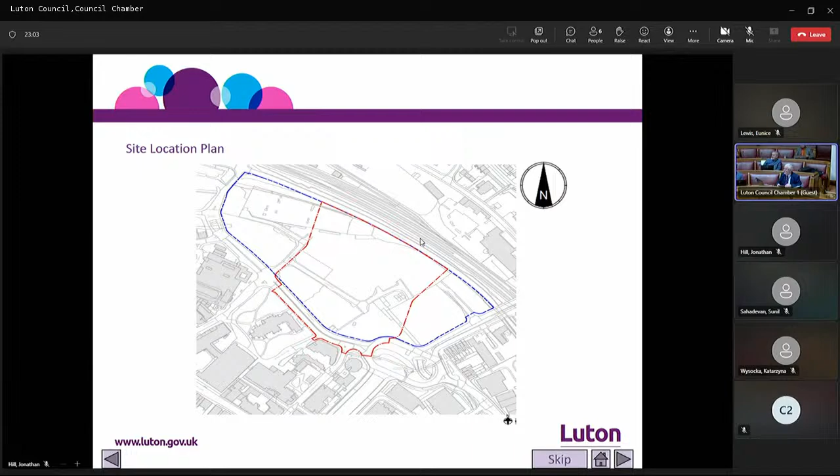The application site is located in Luton Town Centre's northeast gateway, bounded to the north by the route of the Luton Dunstable guided busway and to the south by St Mary's Road. To the west is Church Road and to the east Crawley Green Road. If I could have the next slide, please.

Members will be aware that the application site benefits from the grant of planning permission under reference 16/01400, which as part of these proposals included commercial and residential development and the stadium. If I could have the next slide, please.

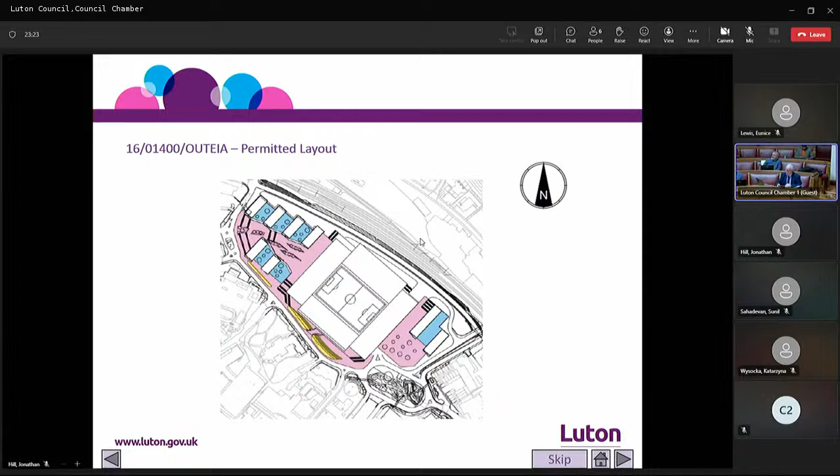A subsequent grant of planning permission under reference 20/01587 provided for the residential and commercial elements of the redevelopment, but excluding the stadium. If I could have the next slide, please.

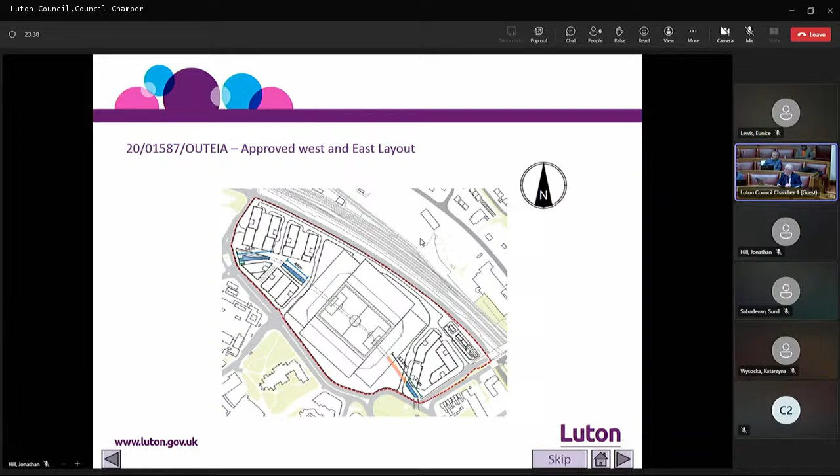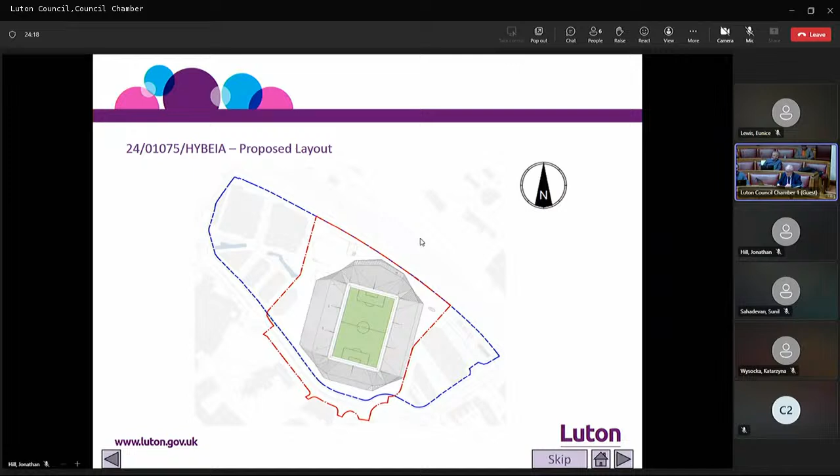This is the application site wedged between the west and east residential elements referred to under application 20-01587. In addition, further applications have been submitted, most notably for engineering works to move earth and create a development platform across the wider Power Court site, and for the realignment and opening up of the culverted River Lea with associated works to enable redevelopment for the stadium.

This slide provides the context for the development of the application site, which is situated in the middle of two mixed-use residential sites. These uses include appropriate town centre uses, a health centre, retail community uses, and food and drink establishments, which were permitted under the 2020 application reference.

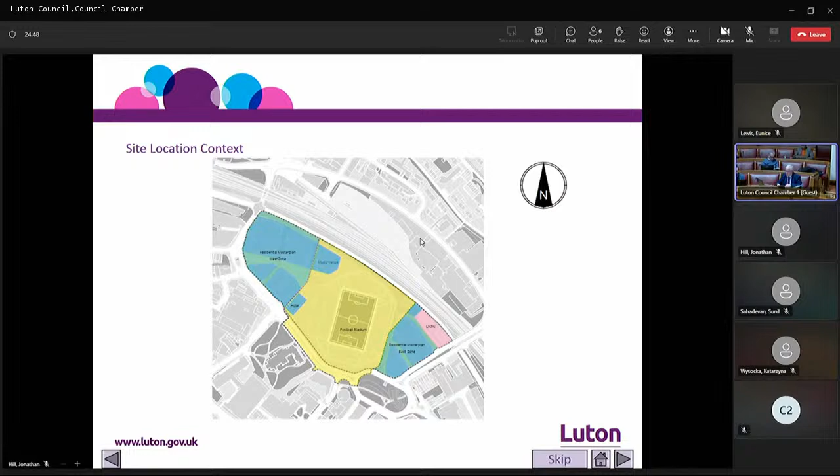This slide shows more specifically the location of the stadium footprint and those elements the subject of the outline application, namely at 1, the one at the top of the slide, the entertainment, music and conference venue, and 2, the one at the western point, the hotel.

The extant 2016 planning permission made provision for both of these elements, and they are carried forward to this application. As set out in the report, save for siting, all other matters—appearance, landscaping, layout and scale—will be the subject of a reserved matters application.

Parameter plans provide details of maximum height, building parcel dimensions, primary and secondary frontages, servicing and plant within that, and public and pedestrian access.

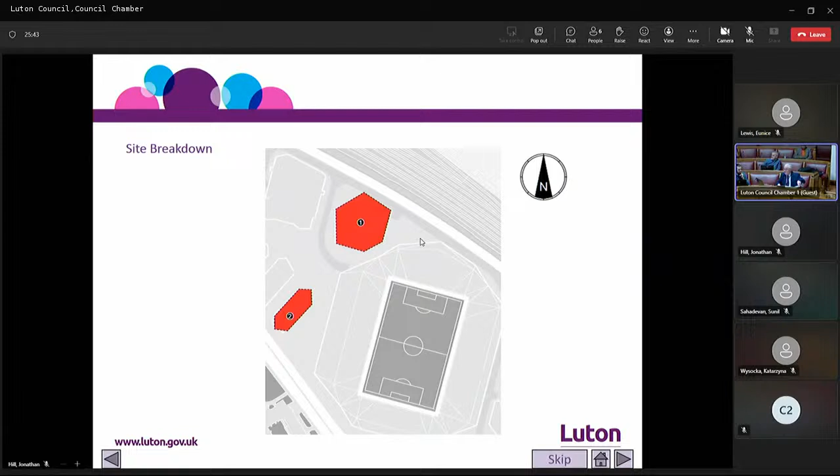Moving on now to the stadium development. The design is covered in some detail in paragraphs 184 to 238 of the report. In this presentation, I propose to deal with the basic concept of the design.

From this slide, the evolution of the form of the stadium can be seen from the four unique stands with corner infills providing both active and working frontages.

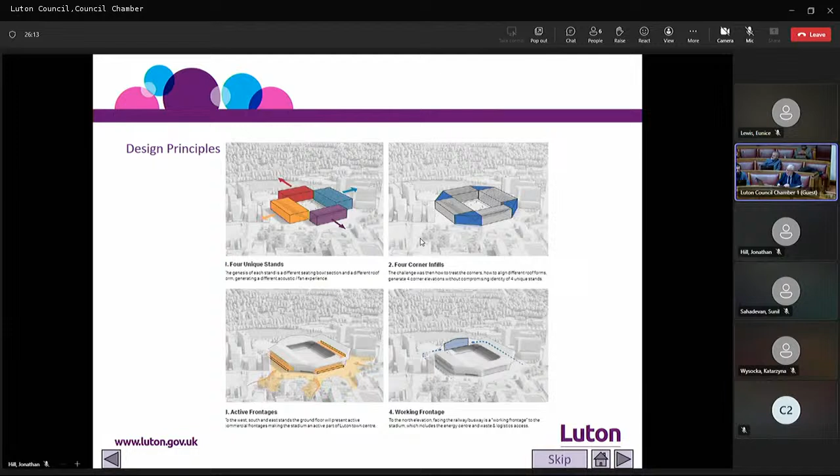This concept then evolves further, providing robust entry portals, corner pod stands, and a scale, height and massing in concert with its surroundings. Finally, the halo, a feature of the 2016 application, is carried forward to the current proposals.

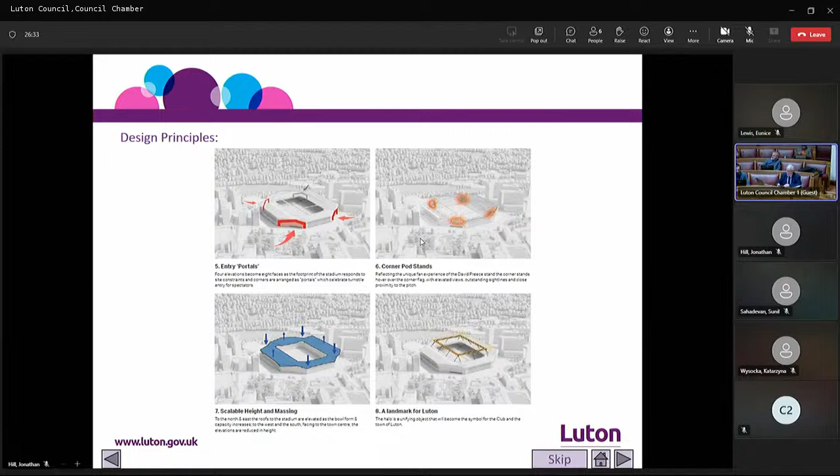This slide and the one that follows show the resulting elevations. You can see from the elevations that the normal boxy type appearance of a stadium is lost with this design, which breaks up the roof by introducing pods at the various ends of the stadium.

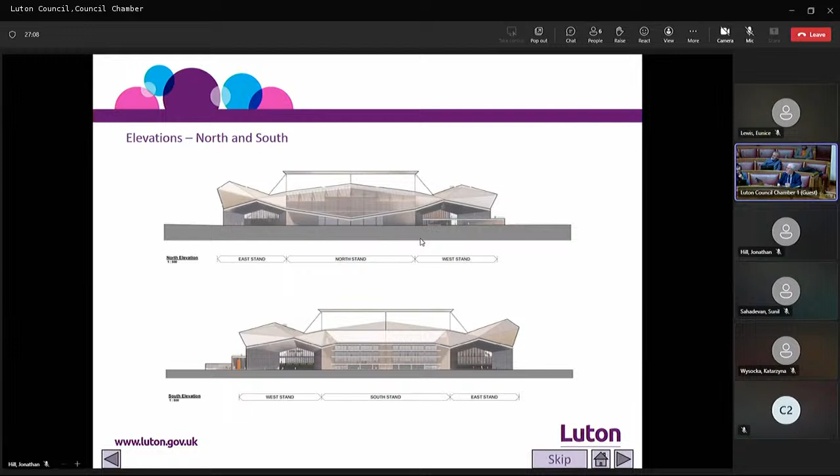That's the north and south stands, the one to which I just referred.

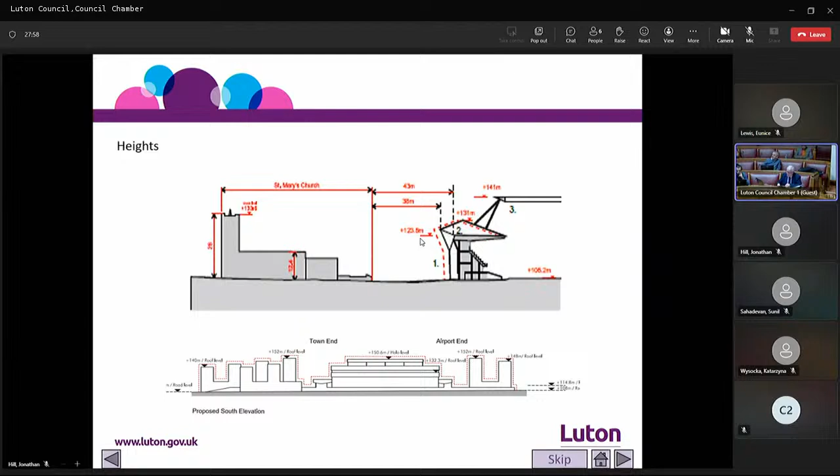This slide shows in more detail the variation in height between the 2016 development and the current application. There is a variation of 9 meters between the extant consent and that now proposed.

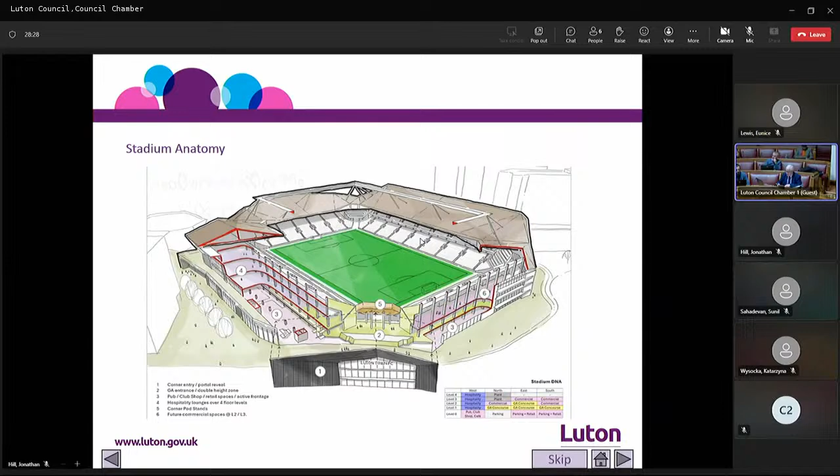This slide shows in more detail the function of the various levels: the corner entry portal reveal, the general entrance, the pub, club shop, retail spaces and active frontages, hospitality lounges over 4 floors, corner pod stands, and future commercial spaces.

At present, the river is predominantly culverted through the site and runs from west to east. This means that currently there are only very small and inaccessible sections of the river on the westernmost and east of the site which are open, while other areas are fully culverted under the site. In the areas that are open, the river cannot be seen as the riverbed is situated 3 meters below ground level.

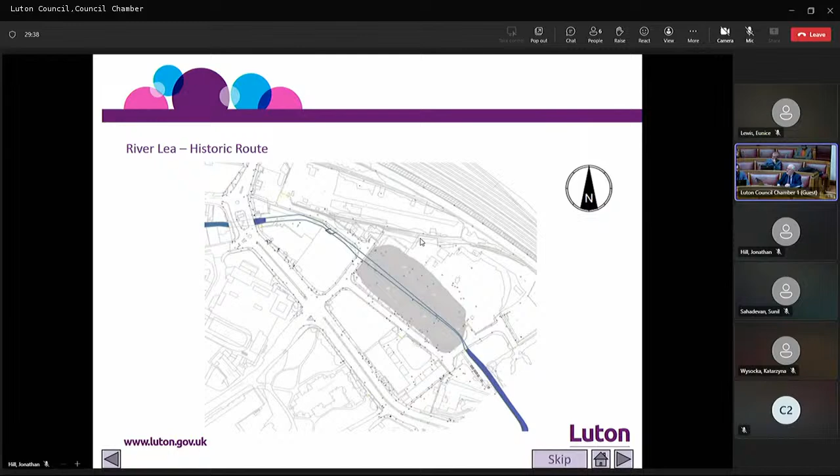The approved 2016 proposal rerouted the River Lea to run along St Mary's Road. The proposal partially deculverted the river in 3 areas while integrating public realm along St Mary's Road, which would still have 2 lanes of traffic running alongside the river.

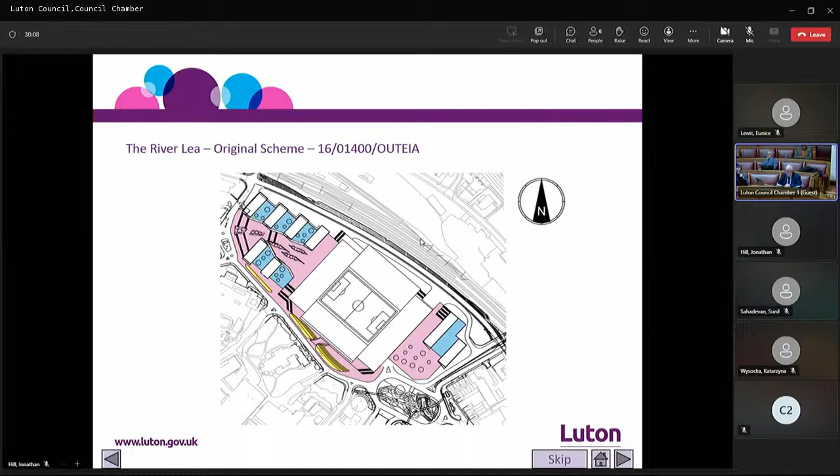The majority of the Power Court 2016 proposal would be on a podium, raised about 6 meters off the ground. This was to facilitate access and parking under the stadium.

In 2016, if that application is pursued, the levels would prove a further constraint to opening up the River Lea within the red line boundary, where the river is 3 to 4 meters below grade, which, if deculverted, would create a deep river trench. To facilitate amenity access, large banks and steps would be required, which would further limit crowd movement and create a barrier to the integration of Power Court with the wider town.

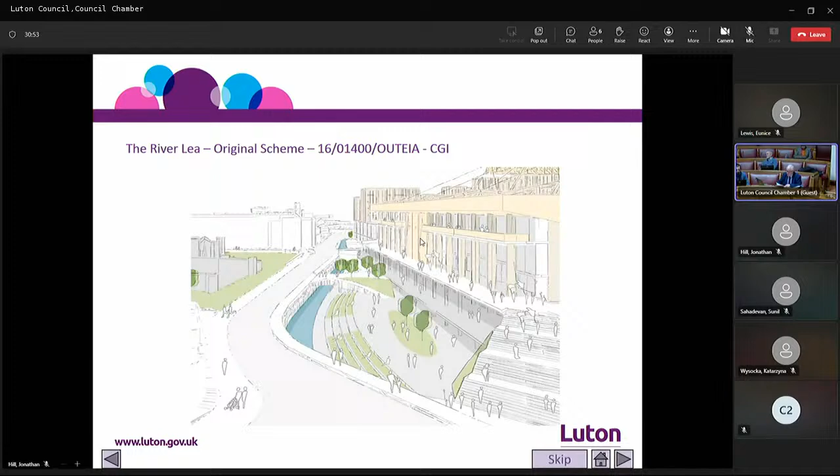The 2024 application, which has been approved, will provide multi-deculverted sections to the west end of the site, whilst ensuring crowd control associated with the proposed stadium can be appropriately and safely managed. Rerouting the central section rather than keeping it culverted under the future stadium will ensure the stadium can be delivered. The river culvert can be maintained sustainably through a new culverted route running along the edge of St Mary's Road around the stadium. The public realm proposals allow the river to be the focal point of the proposed plaza within the site, a significant design improvement from the existing consent.

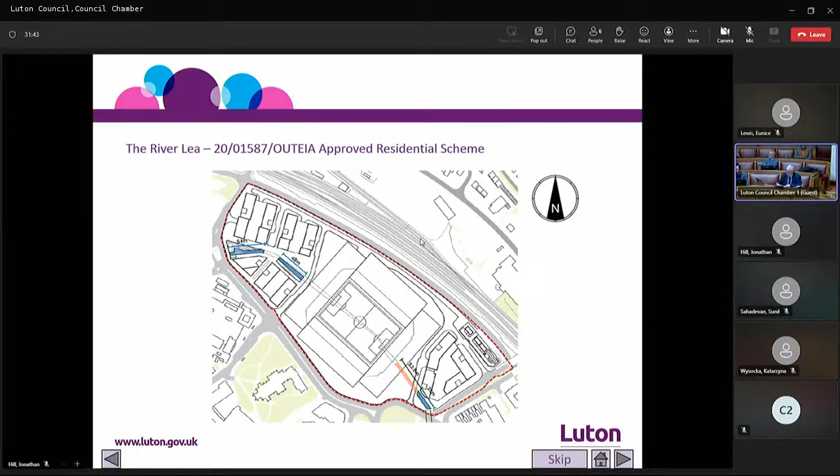This application, to which I made reference earlier, is currently under consideration and provides details of the realignment of the River Lea. It has the support of the Environment Agency, and we are awaiting their final conclusions, subject to the tweaking of minor technical data in terms of modelling. To ensure the development takes place prior to the commencement of the stadium, a condition is imposed requiring the diversion to take place before commencement.

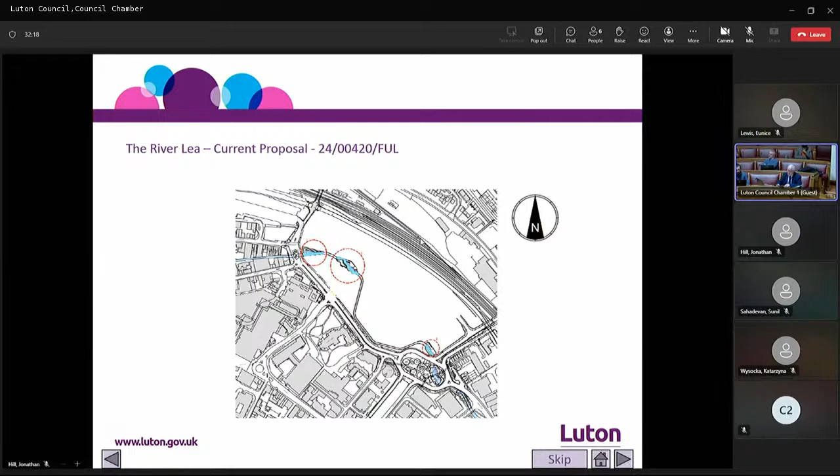This slide indicates the resulting circulation space and connectivity with the immediately surrounding area and the consequent linkage with the town. The area immediately to the right hand is a circulation space, and you can see the importance of that space in terms of crowd control and crowd modelling.

This slide shows how the arrangement of culverting the River Lea in front of the stadium actually links the stadium with the town and provides connectivity, which the 2016 consent would not.

Members will see from the report that the main planning considerations are fully addressed in paragraph 87. The topic heads are set out on page 21 of the report. The report provides a detailed analysis of the development proposed, and it is not proposed to repeat these in this presentation. There are a number of matters which it is considered do need to be highlighted: heritage, biodiversity net gain, sustainability, public realm linkage, and the NPPF December 2024.

The site is adjacent to St Mary's Church, a Grade 1 listed building, and also adjacent to the Plaiters Lea Conservation Area. These are heritage assets against which the development has to be assessed. The matter of the listed buildings has been considered in paragraphs 263 to 268, and both Beams and Historic England do not object to the development, considering that the proposal will result in less than substantial harm to the setting of the listed building, St Mary's Church.

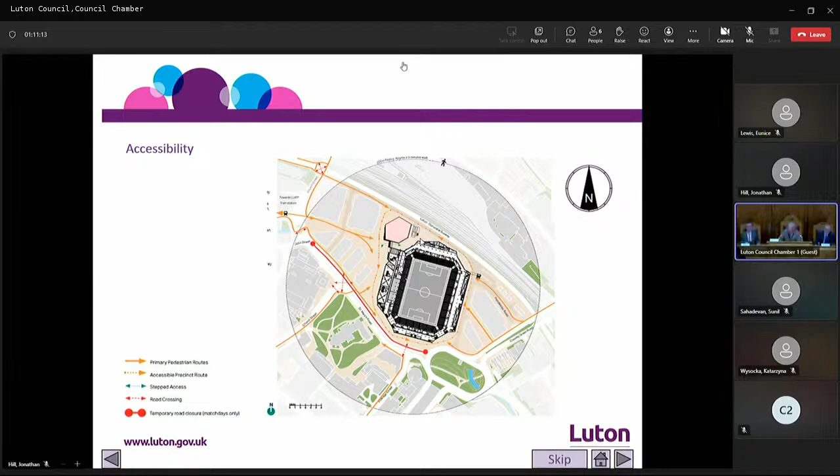At the outset, I would like to emphasise that I'm not objecting to the whole application, only to one small but specific aspect of it. Although I can't claim to be an active Luton Town fan, I welcome their successes and the enhanced community cohesion that this brings to the town. And I was born and brought up in Avondale Road, so I'm quite familiar with how the club operates on match days, at least. But at the same time, the natural environment also brings much to enjoy about our increasingly urban area, and needs to be cherished, particularly since it is a scarce resource within the borough boundary.

My specific objection is to the retention of the culverting of the stretch of the river when it is diverted, rather than designing an open river. The original plan showed the river as being open when it flowed through the site. Now only part of the realigned river is deculverted. Strictly speaking, this aspect is for a different application, 24/00420, but I hope the club will take my comments on board.

Keeping the river open will enhance the Upper Lea Valley Walk at this point. It will help soften the transition of the view from the Grade 1 listed building of the church to the modern stadium. And actually that is a greater worry now that the alignment of the stadium has changed so that the nearest point of the stadium to the church is less than it was under the original plans.